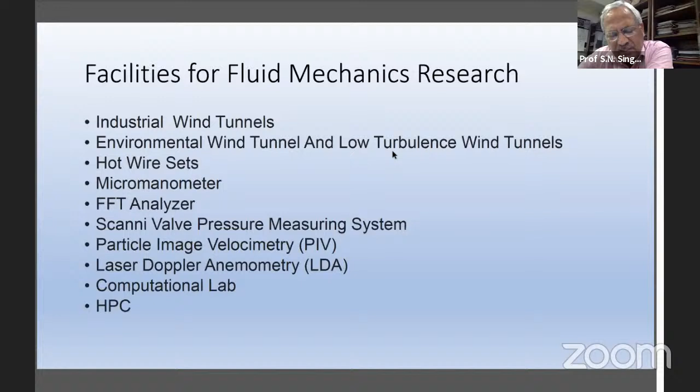We have all those instruments and we have a very dedicated computational lab. And we also have facilities in the Institute of High Performance Computing. So we can do a lot of work both in the area of experiments and computational studies.

So now, having given a brief background, I will start talking about the problems which we have investigated at IIT Delhi. Exhaust plume studies, which originally came as a consultancy, and subsequently 2 PhD students from the Naval Architecture fraternity did their PhD.

Then we had some studies on exhaust diffuser studies, and one of the naval persons did his PhD. Subsequently we continued and did about 2 or 3 more PhDs from regular students.

The subsequent problem which we analyzed was the frigate ship, and what are the issues associated with it, with and without the downwash. When we say downwash, we are basically talking about when the helicopter lands, what effect does it have on the flow characteristics created on the ship due to the different bluff bodies located on the deck.

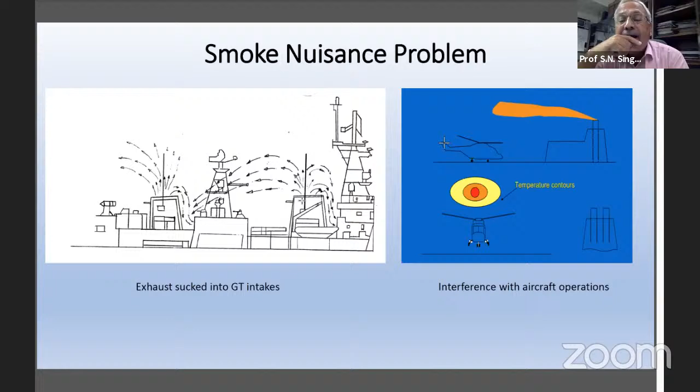But then we wanted to go into the detail of this, because subsequently we also came to know that it interfered with aircraft operations. So we started this. The prediction of flow around the superstructure and the smoke-superstructure interaction is extremely complicated, since the phenomena is affected by a large number of parameters like wind velocity and direction, level of turbulence, thermal gradients, geometry of the structures on the ship deck, and efflux velocity of smoke.

So the superstructure design on naval ships primarily involves an aerodynamic study of the wake of the superstructure. This is where it becomes very important to have a fair knowledge of the aerodynamics of the flow characteristics over marine vehicles.

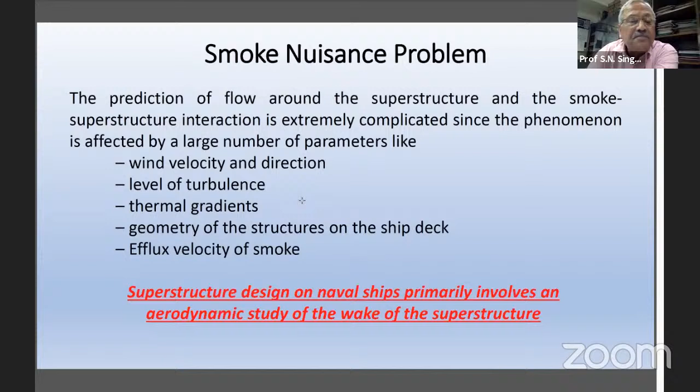The ship designer, at the initial stage itself, needs to be able to visualize the path of the exhaust under different conditions, rank the relative merits of different superstructure configurations, and assess the suitability of air operations. So what we need: wind tunnel modeling, field measurements, analytical methods, or using CFD. These are the options available to us. In wind tunnel modeling, as I told, the type of facilities which we have - the scaling plays a very important role.

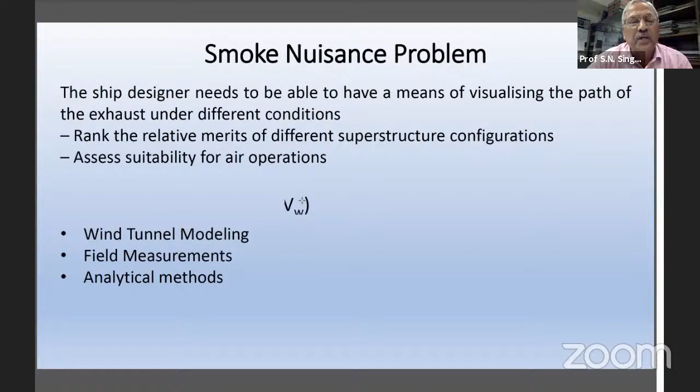And hence, we should also be able to make sure that we convert the findings at the experimental stage to the prototype. So therefore, to do this, we carried out the type of parametric investigations which we did.

This is just to give you an idea, we simplified the top deck structure with different configurations, only having the exhaust plumes in line, staggering them, putting the superstructure in between, putting it ahead, and all those configurations were investigated. In total, about 112 cases were carried out.

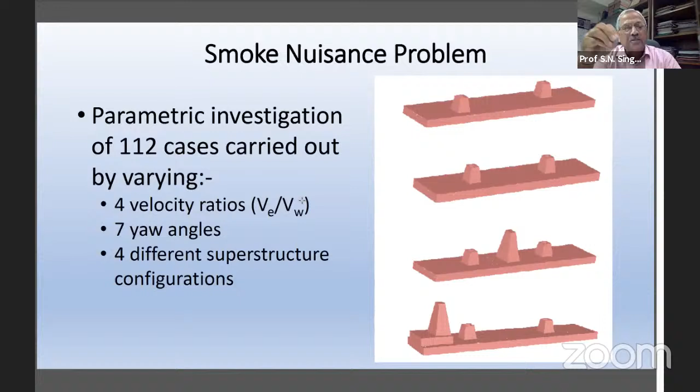Not all by experiments, but using experiments and CFD. So this is how the model in the wind tunnel was simulated for a computational domain. You can see this portion, the wind tunnel cross section, and the model with the thickness above the sea level, where the surface of water is simulated.

And measurements were taken, and the visualization for smoke was done. I'm not going to go into deep of this, but we basically developed the computational model.

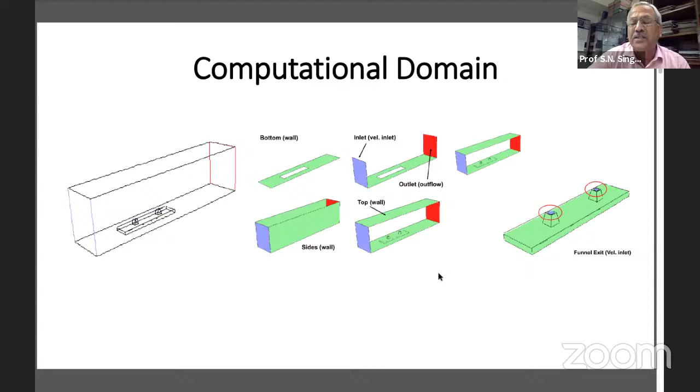And now if you see the smoke visualization, please forgive me, because the smoke visualization is being shown in one direction, whereas the CFD simulations are being shown in the other direction. But if you see the results by CFD, it really picks up very well the flow structure over the simplified deck in all the cases. So if you see, there are different parameters which we have used, and see the comparison.

Of the smoke with the path lines which have been generated from the CFD simulations, it really matches quite well with the actual practical flow structure which happens on the ship.

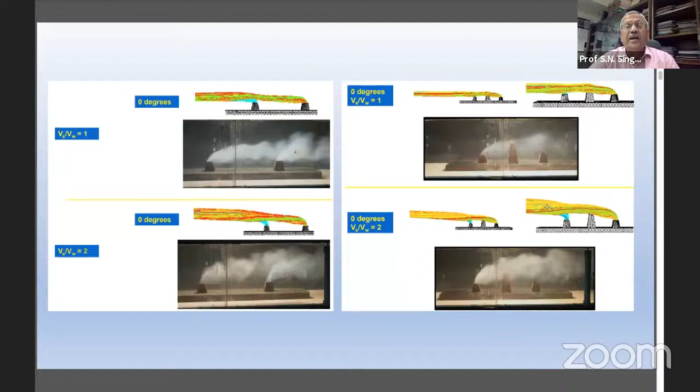And now you see how, with the help of CFD, the structure being placed ahead of the plume, how the plume actually lifts up drastically, because it falls in the wake of the superstructure and does not disperse, and therefore it lifts up higher in the atmosphere. And even the CFD picks it up.

And even the small smoke entering into the reverse flow can also be seen in the CFD simulation. So this is how the actual flow behind one of the exhaust plumes can be seen. And as we vary this, the second case actually shows the interaction which is going to take place between the two flows of the exhaust plumes.

Now if this has been known in the initial design stages, one could very easily decide the locations of how to place the exhaust plume or the superstructures, which may not interfere with the operations of the ship.

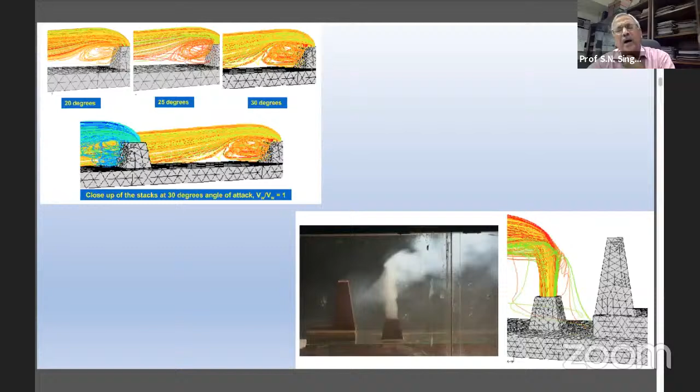So there were modifications suggested for avoiding the smoke nuisance problem through this study. And this study was done by two students. One of them today is a professor in IIT Madras.

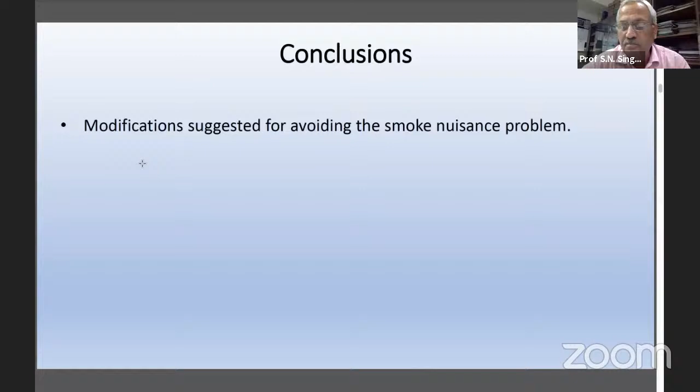Coming to the second problem, which I'm not going to go into too deep, this was also work done on a submarine to evaluate the hydrodynamic coefficients, establish the maneuverability of the submarine. CFD helps you to predict the hydrodynamic coefficients, and we used the existing results in literature for validation.

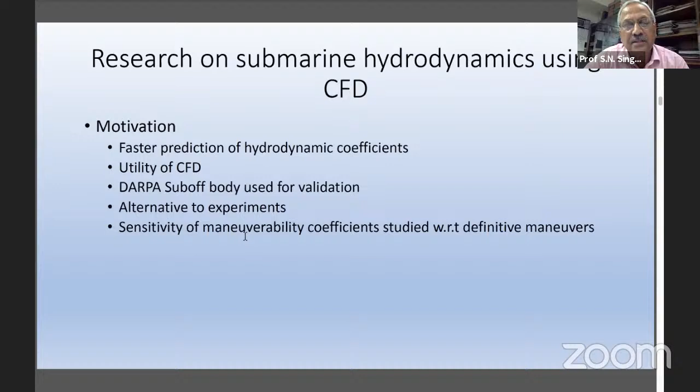Because doing experiments on submarines in IIT Delhi was not feasible, we used the results available in literature, and then did a sensitivity analysis of maneuverability coefficients with respect to definitive maneuvers which a submarine is supposed to take. So this is again how the CFD domain and mesh was done.

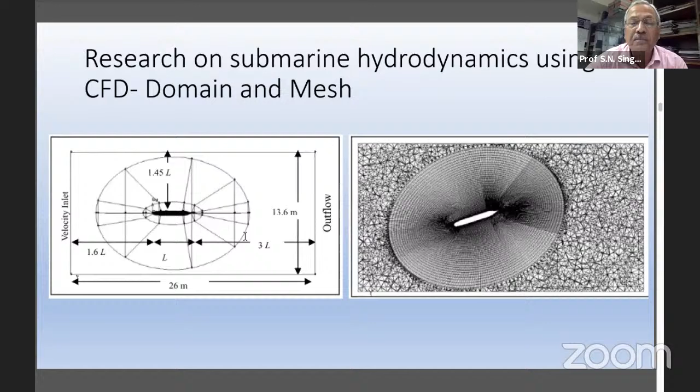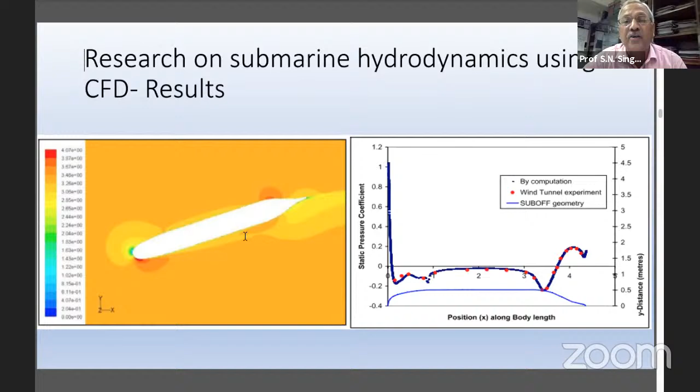And it was done in blocks, so that one block, which basically had a very dense meshing close to the submarine, was an elliptical cross section, so that this block could be independently rotated to get to the different maneuverability positions and see how the flow behaves. So these are some of the results which were obtained on the hydrodynamics of the submarine.

So now we come to the ship airwake, helideck flow field for safe helo operations without downwash. So this basically, we took the model which has been established to represent the flow over the frigate ships, classified as SFS-1 and SFS-2.

And because it involves a lot of issues, because there is a huge investment in the construction of the ship and the aircraft, it is very important to make sure that the operations of the helicopter and others do not overload the pilot while he has to land, or there could be accidents.

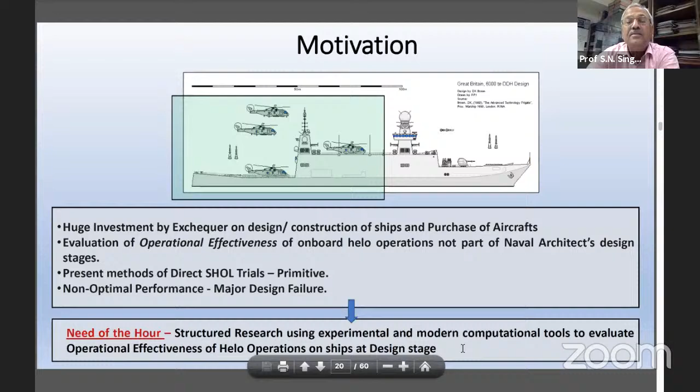The aim of the present research was to investigate the flow structure on the prevalent helodeck configuration of frigate form ships, through experimental and numerical methods, and identify flow parameters defining the structure. We aimed to formulate a methodology for numerical evaluation of the flow on the helodeck, and then arrive at some set criteria which, if met on the frigate ship, could lead to safe helo operations. So the aim was to identify solutions which can be effectively used to tailor-make the superstructure wake on the helodeck to improve conditions for helo operations.

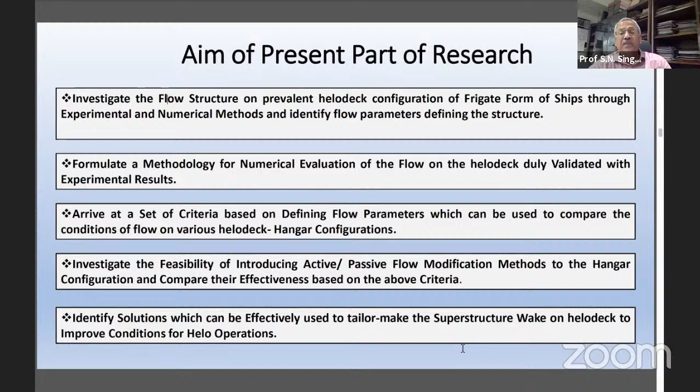In the experimental analysis, both quantitative and qualitative data was generated experimentally by taking mean velocity measurements using impact probes, a 5-hole probe, and by doing flow visualization studies on the scaled model of the frigate. Different geometrical changes and dynamical conditions were tried to see which gave us the best results.

One question which could be raised today is: are these feasible changes on the frigate ships? That's a question which needs to be answered by seeing the actual workings.

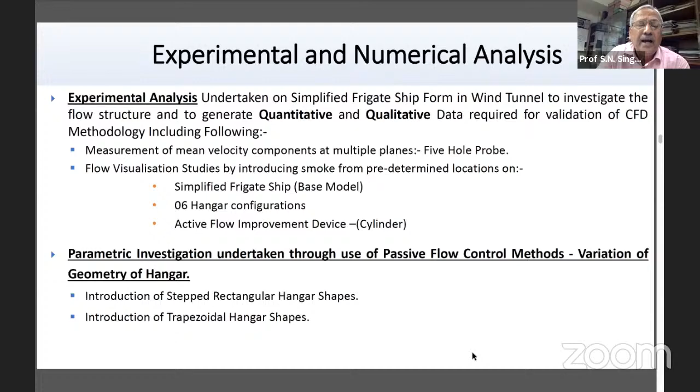Different configurations of the hangar were tried, some geometrical and some dynamical, so we will go through them one by one. In the active devices, we tried to deflect the flow over the hangar, or use a rotating cylinder to suppress the zone of separation just downstream of the hangar. While doing this, we also needed to find the criteria for comparative assessment, which would give better flow characteristics for safe helo operations.

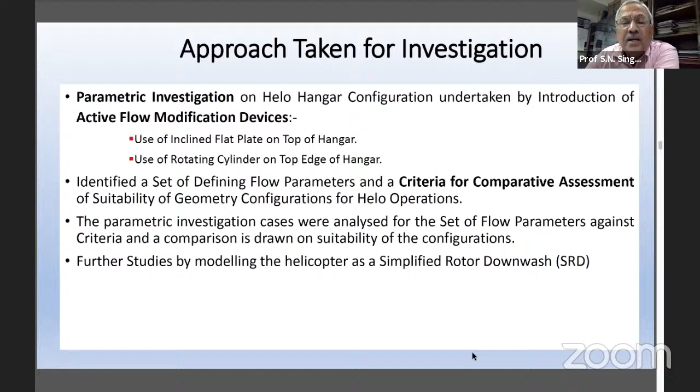This is a study which is being done without considering the helicopter. The flow which the helicopter pushes at the time of landing, we did not simulate in this study, but subsequently we did try to model the helicopter downwash using a simplified rotor downwash. So this is primarily the model which you see, which we considered.

This is the wind tunnel which was used for doing this study. The same wind tunnel was even used for the smoke nuisance problem, because we wanted to take a lot of measurements. The initial work, when they approached us for the smoke nuisance problem, was done in a 5 feet by 5 feet cross-section tunnel, because we wanted to ensure minimum effect of blockage while doing that study. If the blockage in the tunnel remains less than 5%, we don't need to do any corrections.

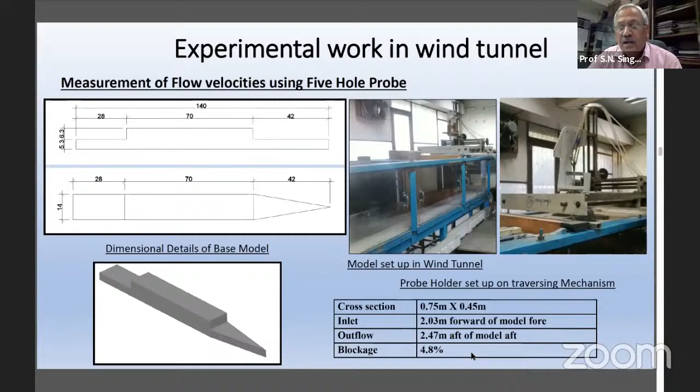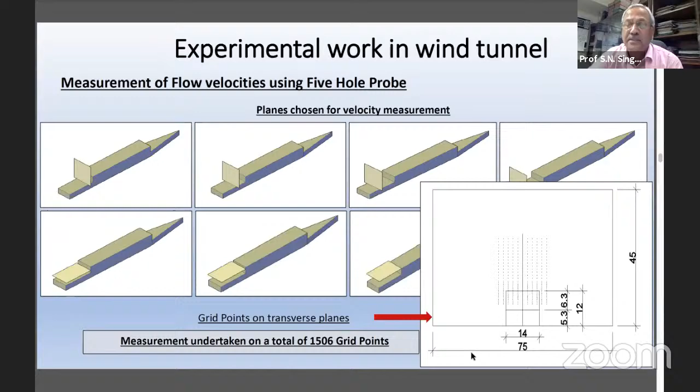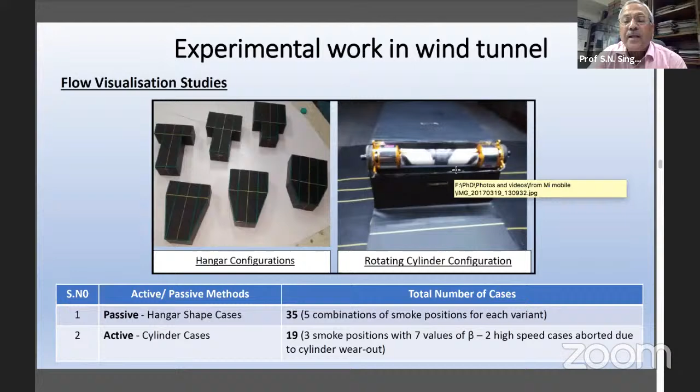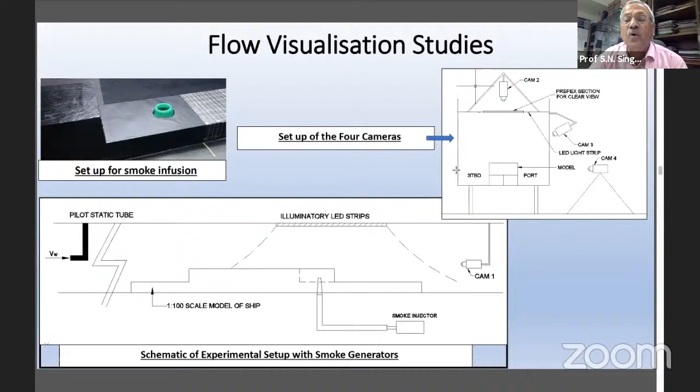We performed this study - I won't go into detail on how, as it would take too much time - but we used different cameras to capture the flow visualization. Having done the validation against the in-house experiments and flow visualization, the SST turbulence model was selected for the CFD analysis, or the transition SST model.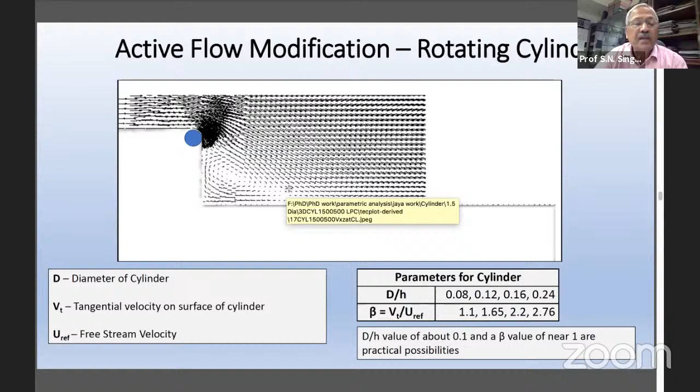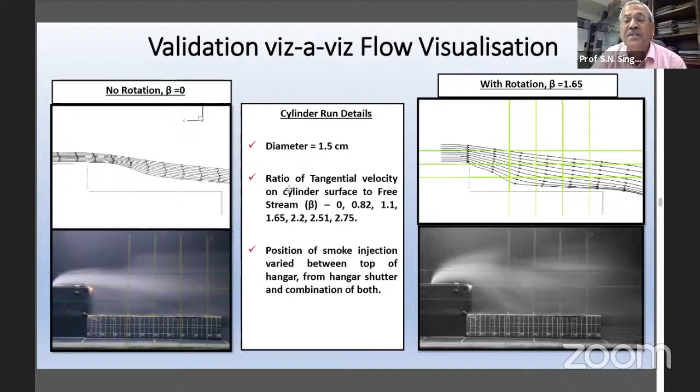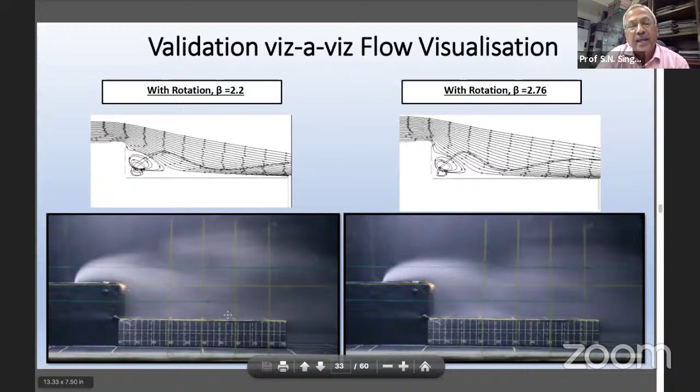So all this was done - you can see the comparison of the CFD and the flow visualization. This is with some rotation, this is with increased rotation. The cylinder can be seen rotating, and the smoke has been injected upstream of this. As you increase the value of beta, the velocity ratio primarily, it helps you to reduce the recirculation length.

So the overall assessment for the cylinder is that it introduces dramatic changes which are very favorable. The length is reduced, and there is no significant change in the turbulence level by introduction of a cylinder.

Criteria of downdraft nearly remains the same, it does not. However, there's a significant increase in the mean of the vertical velocity component on lower planes, which supports the landing.

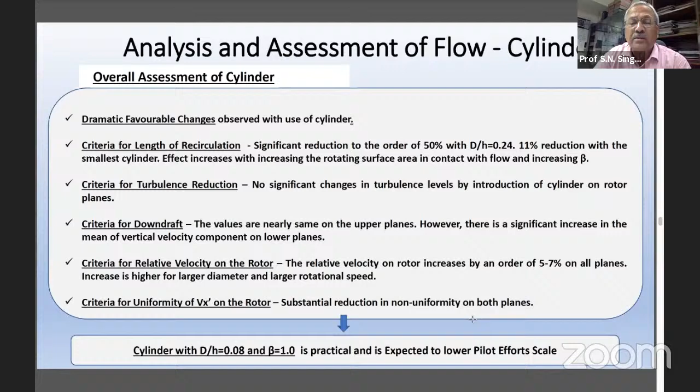And the uniformity of the flow over the helideck. So it is expected that if we could have such a system, it will lower the pilot effort scale.

So this is basically the conclusions which were drawn. The two important ones are: the rotating cylinder, and the other important criteria which we could see is the hangar configuration.

The hangar configurations with slight taper on the sides do improve the flow characteristics over the helideck, whereas the plate on the top of the hangar really did not help improve the flow, but needs slightly more investigation to understand why it doesn't help.

So I'm not sharing the results which we have done for the downwash, because the thesis is still under evaluation. So I'm not going to share those results where we have the downwash of the helicopter and done similar studies to see how the flow characteristics change on the helideck.

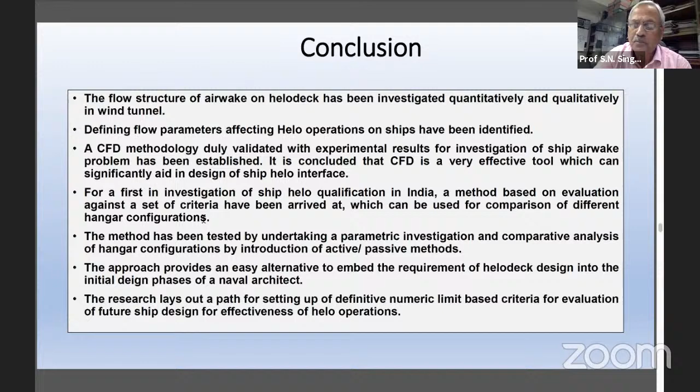And now the last study which has been done is the airwake studies. The primary aim of this study was to identify the burble effect, which is basically a change which takes place along the landing path of the aircraft, just about 800 meters downstream of the aircraft carrier.

Along the 3 degree glide path, which is generally taken by pilots to land the aircraft, there is a sudden dip in the axial velocity, and when the aircraft passes through that burble, it suddenly loses some lift and has a tendency to deviate from the landing path.

And that is where now, because this is just located about 800 meters away, the time left for the pilot to take any corrective measures is very small, and hence all his abilities are put to task.

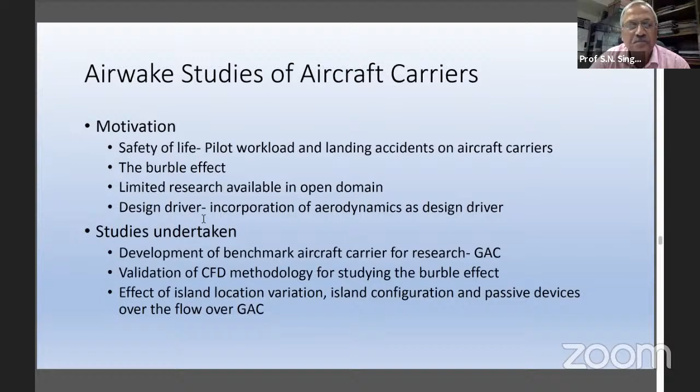So if these two interact, as you move down, they will interact and then create the burble along this path. And hence, we need to see how one could identify and suggest some changes which will help either delay the burble or reduce the impact of reduction of velocity which takes place.

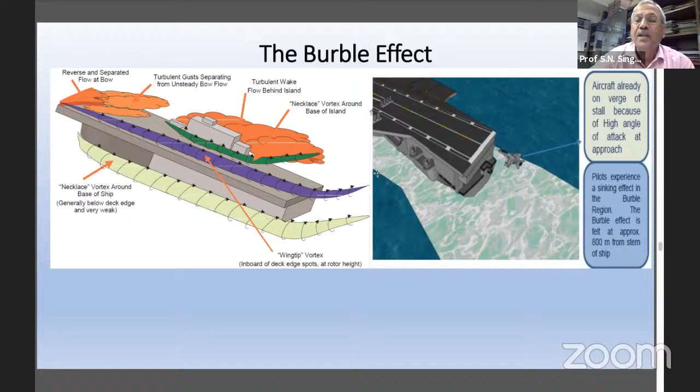So keeping this in mind, this is how basically we considered the different aircraft carriers which exist and developed a generic aircraft carrier. So aircraft carriers which we considered did not have a ski jump, whereas India generally uses one with the ski jump, which also presently we are doing some studies with, and should be able to throw some light on that.

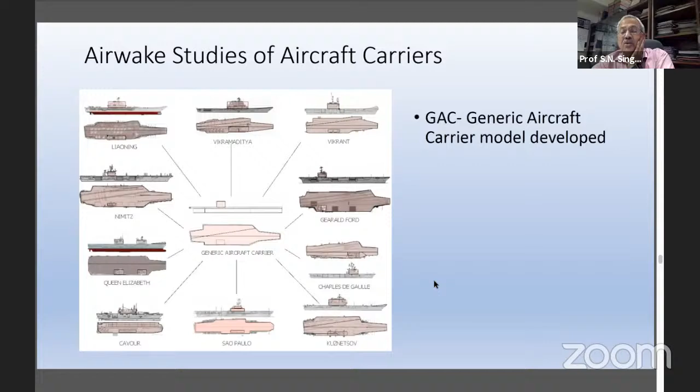So this is basically the generic aircraft carrier which was made, fabricated, and the parametric studies which were done were primarily to measure the pressure distribution over the helideck with the island in position.

And lift the island and see what is the effect both ways, to see if it does have an effect on the bubble.

And then we basically tried to see, because the studies on the aircraft carrier without the island showed that the bubble primarily was formed because of the vortices generated due to this port notch. The starboard notch does not have any significant influence, but this notch and the bow, if they interact, create what we see as a bubble effect.

And this, when the island is placed, it magnifies the bubble effect, because the vortex generated due to the island interacts with these vortices generated at the bow and the port notch and creates the bubble effect along the glide path.

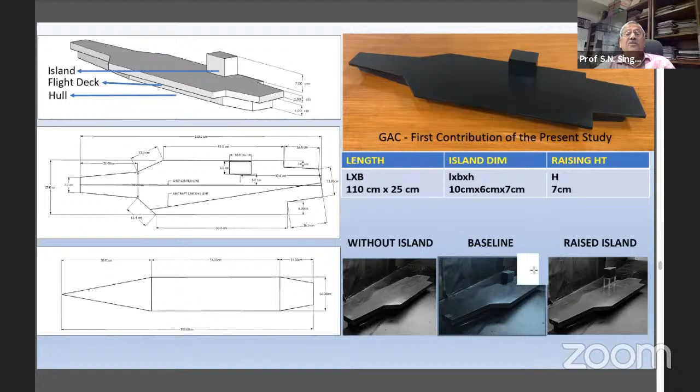So this is basically the plan of how to carry out the work, but I'm not going into detail of this because it will take too much time.

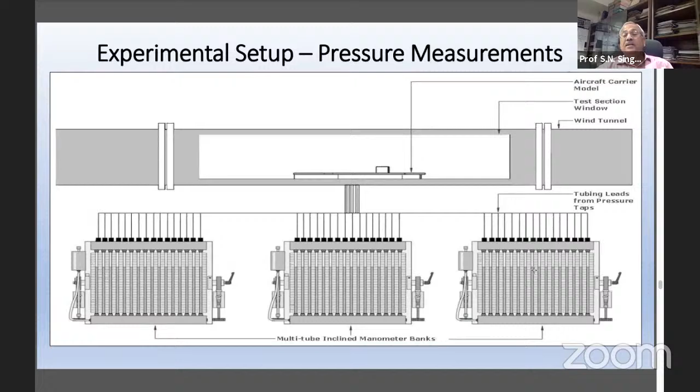I've exceeded my time, it looks like. Can I take another 5 minutes? Hello? Yes, Professor Singh, 5 minutes is fine.

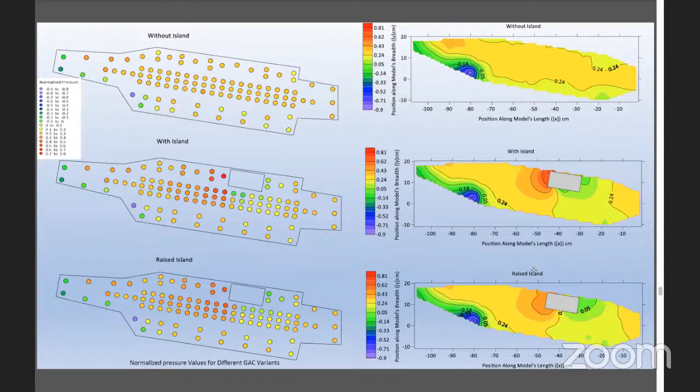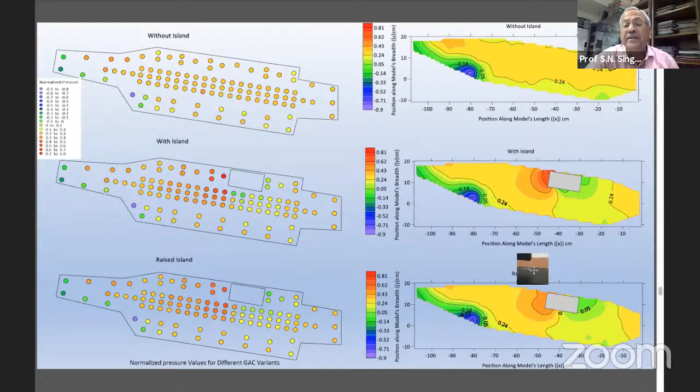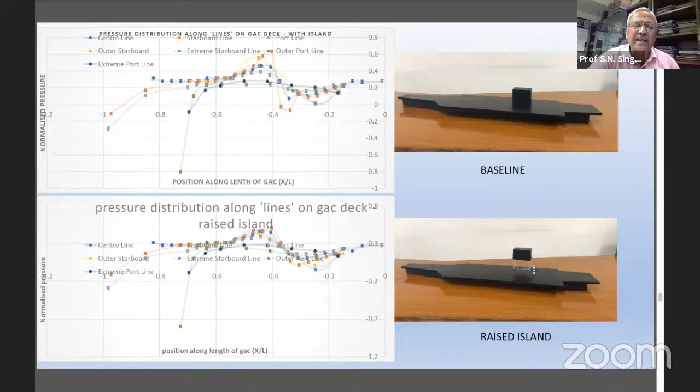Thank you. Okay, so these are the results which we obtained for the pressure and compared them with CFD, and it nearly matched for the SST Turbulence Model, both with the island, without the island, and with the raised island.

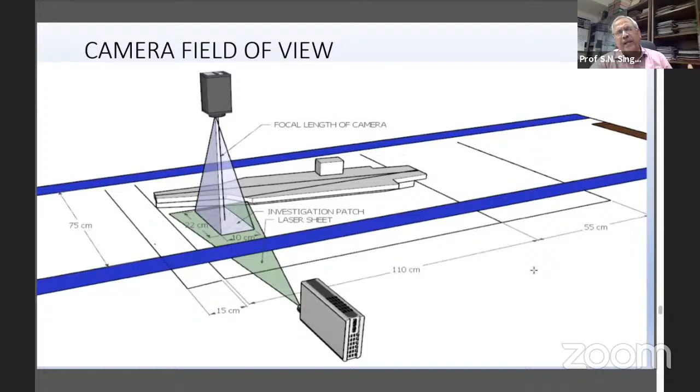The velocities were measured using PIV at different levels, so that it became a benchmark data for doing any validation studies using CFD. And having done all the analysis...

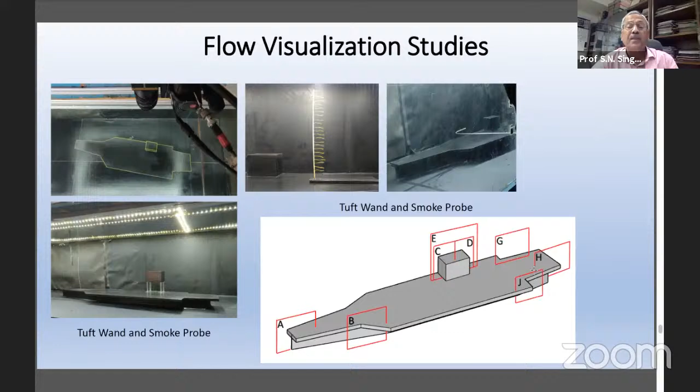The additional studies which were done, when we found that the vortex generation at different levels was creating a problem, we tried to suppress these vortices by providing or changing the geometry of the aircraft carrier. Like if you see, we are trying to suppress the vortex by providing plates at all these surfaces.

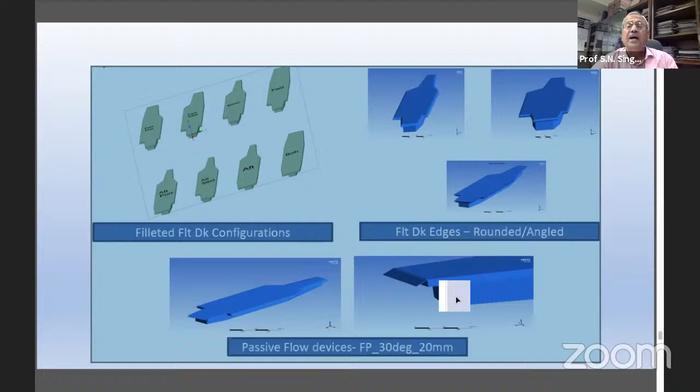These were all passive flow devices tried to suppress the system, and then also identifying the location of the island, lifting the island.

So this basically was done, and it was found that providing the island, aligning it with the flow direction, and lifting the island a little bit helped significantly in suppressing or lowering the deficit of velocity.

So these are some of the studies which have been done, and this table highlights in general the findings of each parameter which has been investigated.

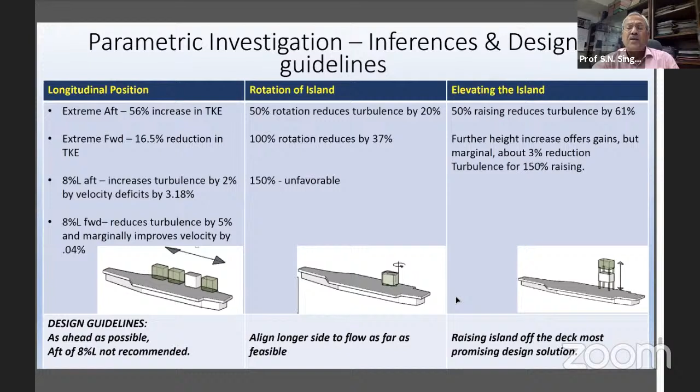Some work which is at the moment going on is the self-propelling submerged bodies. It is basically underwater vehicles, and we are trying to see, generally we study these using tow tanks, and we are doing it in the wind tunnel.

We are trying to measure the pressure distribution over the body and change the effect of hull shape, and then evaluate the hydrodynamic coefficients.

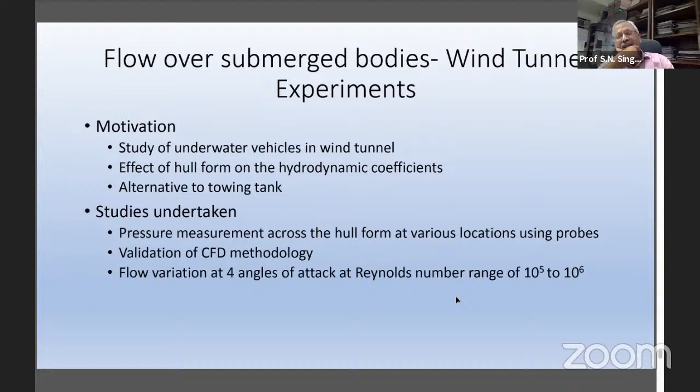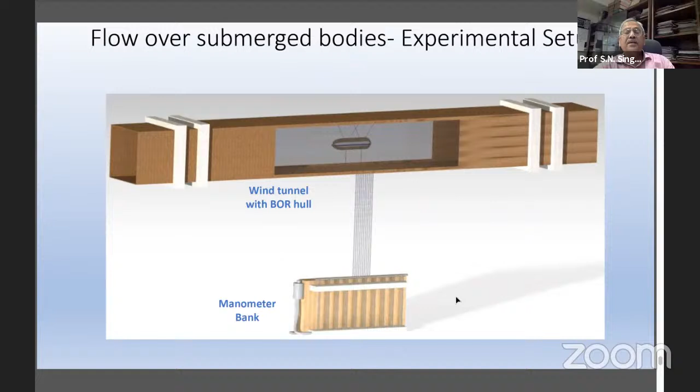So presently the pressures have been measured and validation has been done. And this is what the setup was done. So you can see the body, how we held it, and what are the pressure taps provided to measure the pressure distribution over the body.

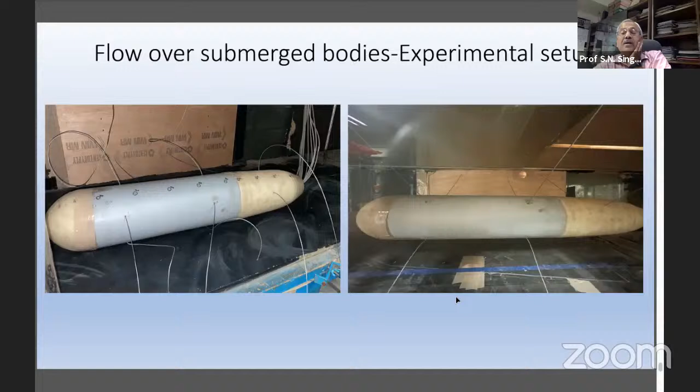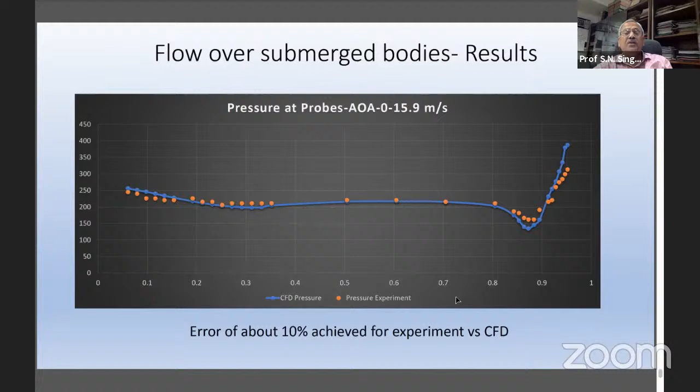And you see the results, how well they match the CFD results with the experimental results. Reasonably, the maximum error is about 10%. So this work is also going on.

I would say that we have been able to get a significant amount of insight into the flow structure of different marine vehicles. And this will go a long way in helping the Indian Navy, and also to do some initial studies at the design stage itself to improve some of the superstructures which have to go on to the ship.

Thank you very much. Sorry for having taken slightly longer time.

Any questions, please? So first of all, thank you very much, Professor Singh. It was a very, very interesting journey through your 25 plus years of research in aerodynamics for the Indian Navy.

I have a few questions myself, but first, can I express my thanks, and I'm sure the audience would normally applaud if they were in the same room with you. So I'm sure I'm clapping over here, and I think the rest of the participants will be doing the same thing in their own locations.